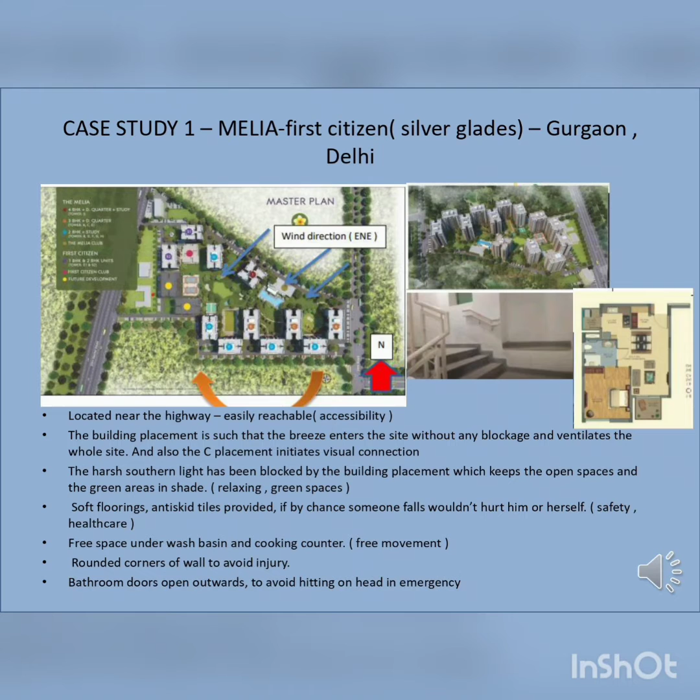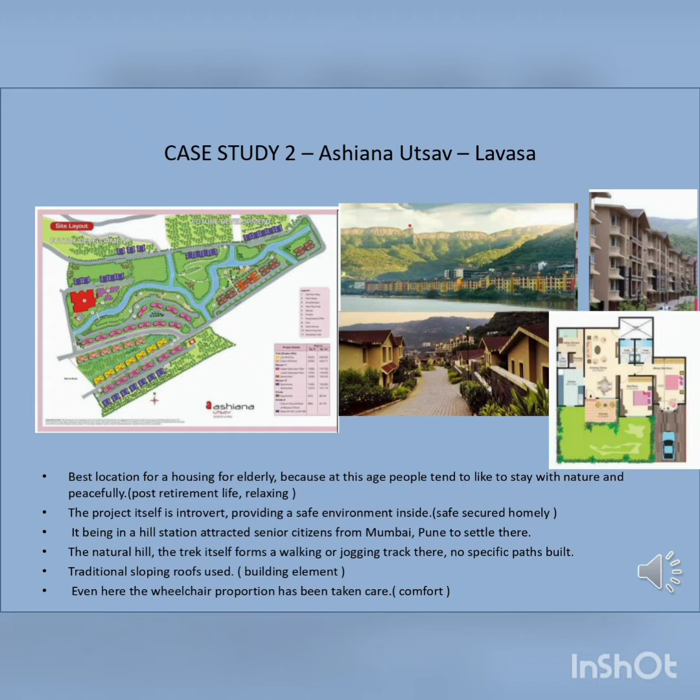The second case study which I did is situated in Lavasa, named Ashiana Utsav. The location is best for housing for elderlies, as at this age people tend to like to stay with nature and peacefully. The project itself is introvert, providing a safe environment inside. Also, they have used a traditional element of sloping roofs in their design.

My initial concept started with providing visual connection, proper parking facilities, well ventilated units, and proper interaction in the design, and also good green spaces to relax.

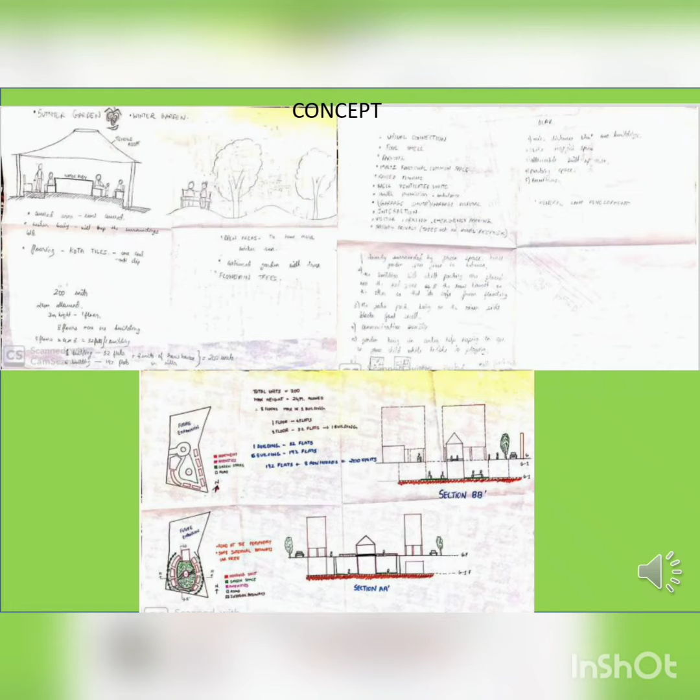Our site is situated in Nasik along the Pathardi Phata highway. Just in front of the site is situated the rural development of Pathardi Phata Gaon. Just beside, on the west side, is situated an existing housing society, whereas on the east side are already existing farmlands and a yoga ashram.

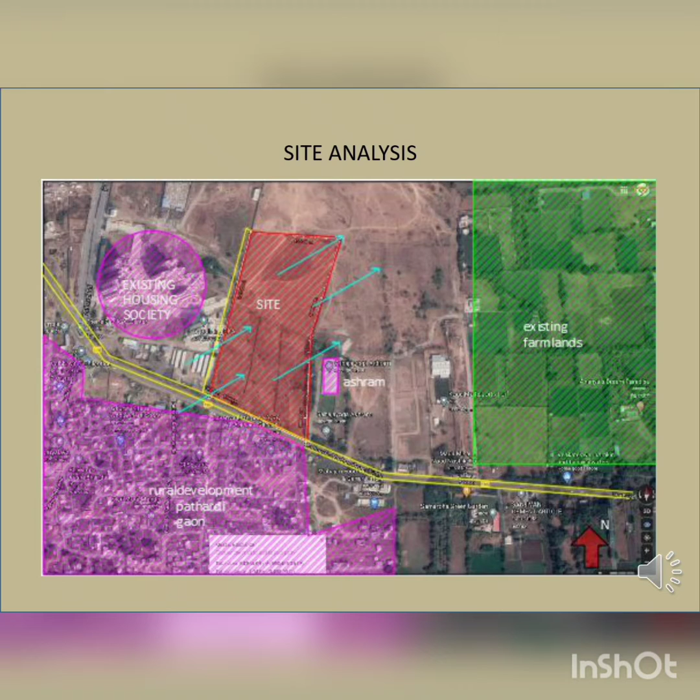The wind direction is from southwest to the northeast. We were provided a site of 50,000 square meters, where we had to develop our design in an area of 20,000 square meters, and the rest is left for future expansion.

This is the site plan. There are 3 entries provided to the site, one from the highway and the other 2 from the service road. There are 3 building blocks. The placement allows the southwest wind to enter the site, keeping the site well ventilated. The areas hatched in blue are the provided 4-wheeler parking for the residents.

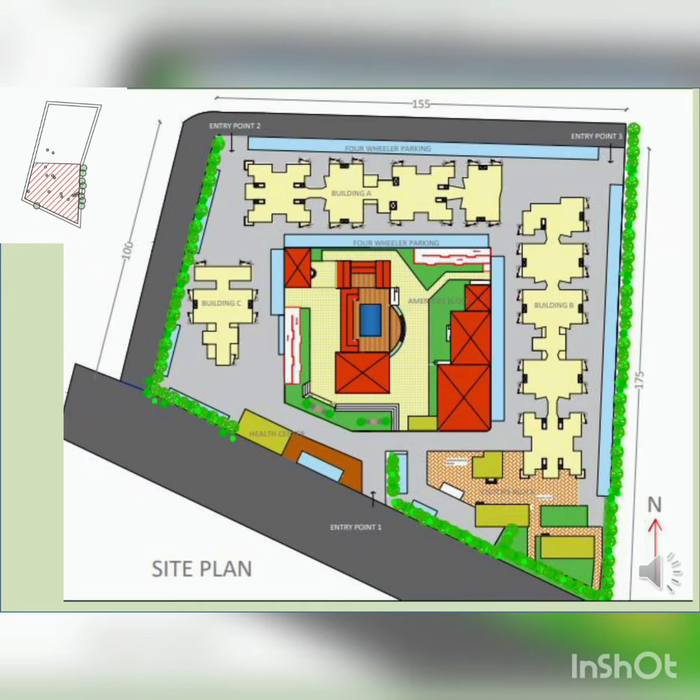This is a 55 square meter unit flat layout. I have tried to provide flow free access for the senior citizens to move around easily, and also for a person who is on a wheelchair. I have provided the bathroom doors opening outside, so that in case of any mishap happening in the bathroom, the other person would open the door outside and not inside, because if it opened inside, it could bang on the person who has been lying inside because of the mishap.

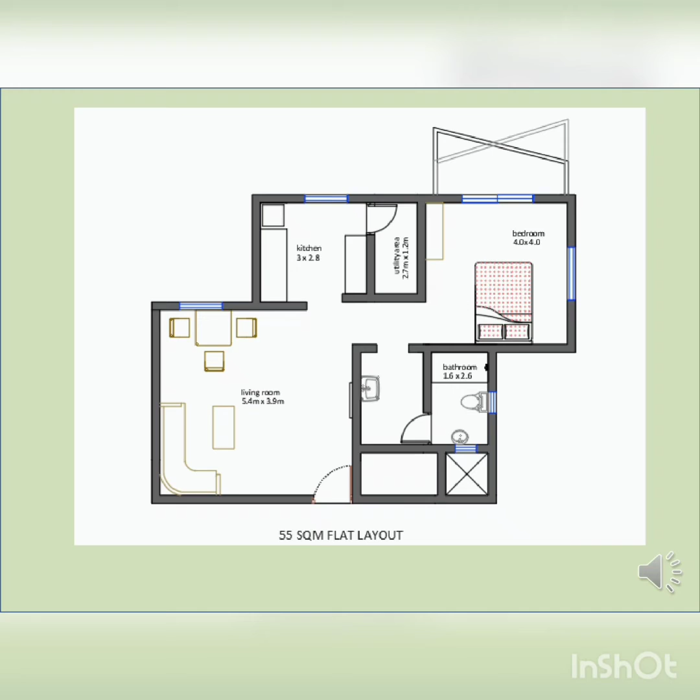This is an 80 square meter flat unit layout. I have tried to provide good openings to keep the flat well ventilated and well lighted. Even in this layout, I have tried to make flow happen easily, and even the bathroom doors open outside.

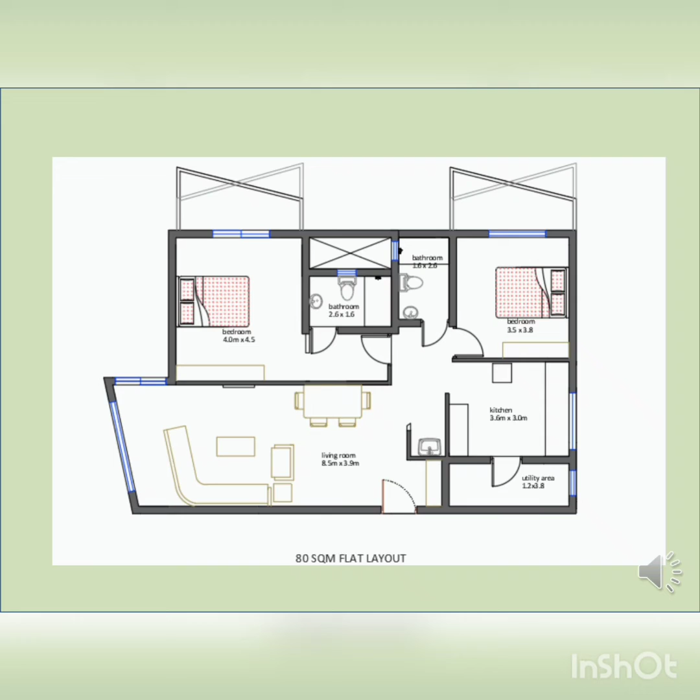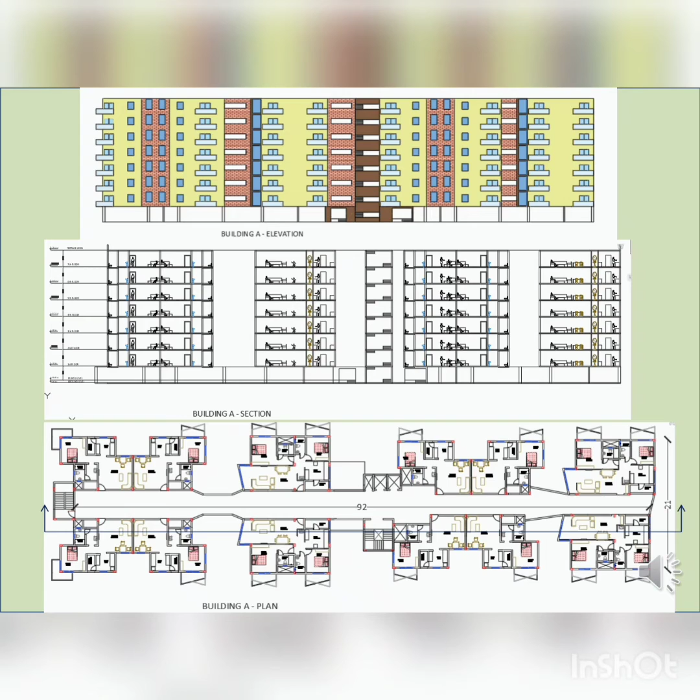The lobby is straight and free flowing, so that in cases of emergency a stretcher or a wheelchair could move easily through the lobby. Even the lobbies have been kept well ventilated and lightened by providing openings in between.

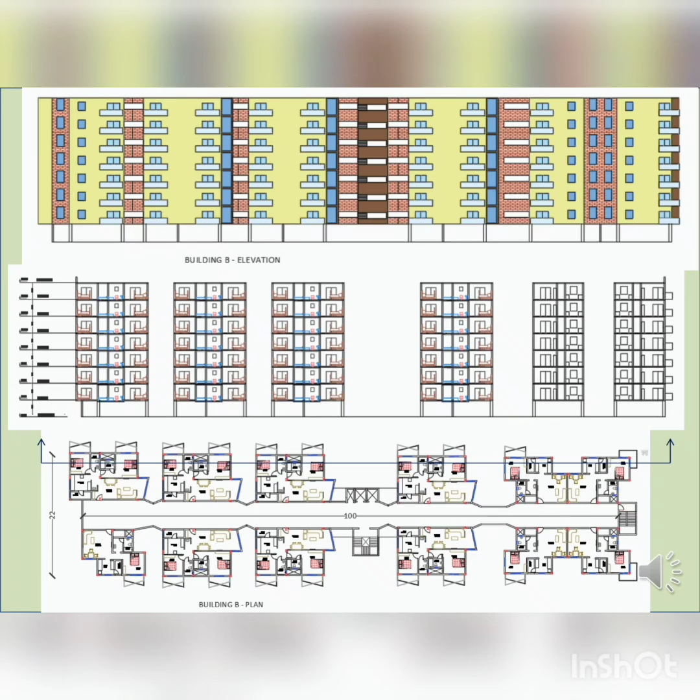This is building block B. This building block consists of 5 flats on one floor and a total of 35 flats in the whole building. Even this building is G plus 7. For the facades, I have used red brick wall and different color paints to make the building look beautiful and interesting.